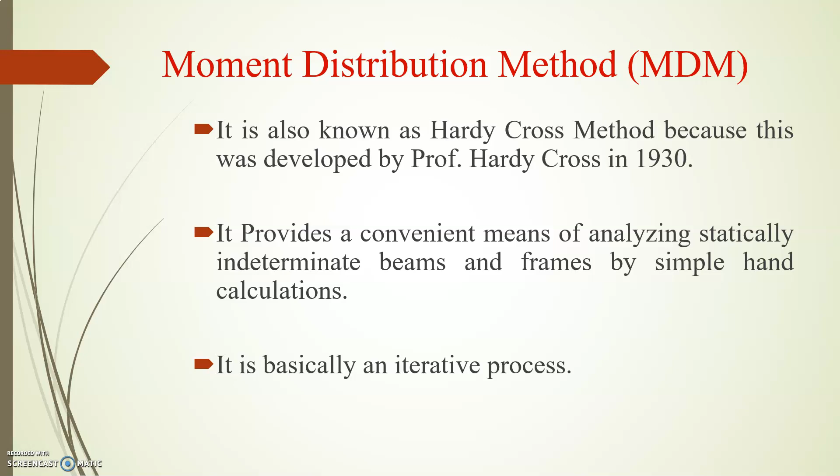It is also known as the Hardy-Cross method because it was developed by Professor Hardy-Cross in 1930. It provides a convenient means of analyzing statically indeterminate beams and frames by simple hand calculations. It is basically an iterative process. Iterative means repetitive - a particular number of cycles need to be performed until we get the desired accuracy. That is called an iterative process.

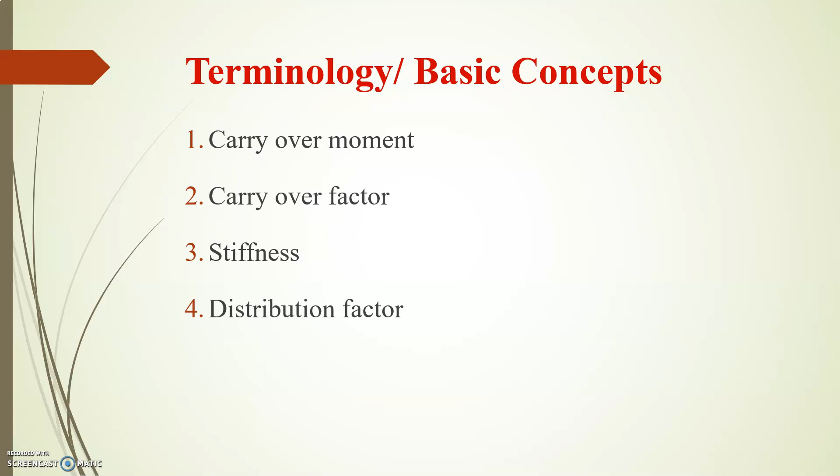Now there are four important terms that one should know before solving the problem by moment distribution method: carryover moment, carryover factor, stiffness, and distribution factor. So what is carryover moment?

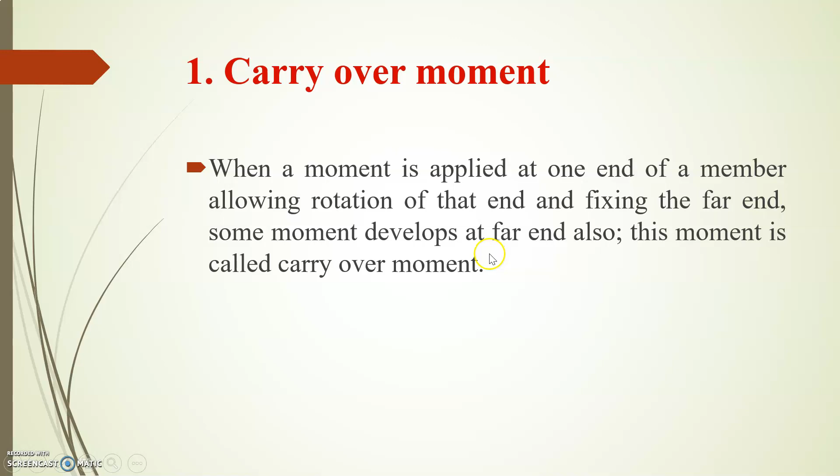When you apply a moment M at one end where rotation is possible, what is the property of a hinge support? It resists the vertical reaction, it resists the horizontal reaction, but it can't resist the rotation - it allows rotation. And what is the property of a fixed support? It resists the vertical reaction, it resists the horizontal reaction, and it also resists the moment.

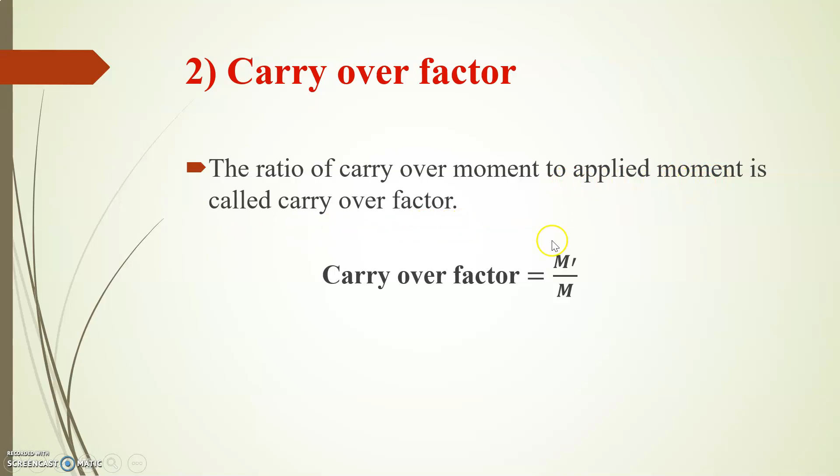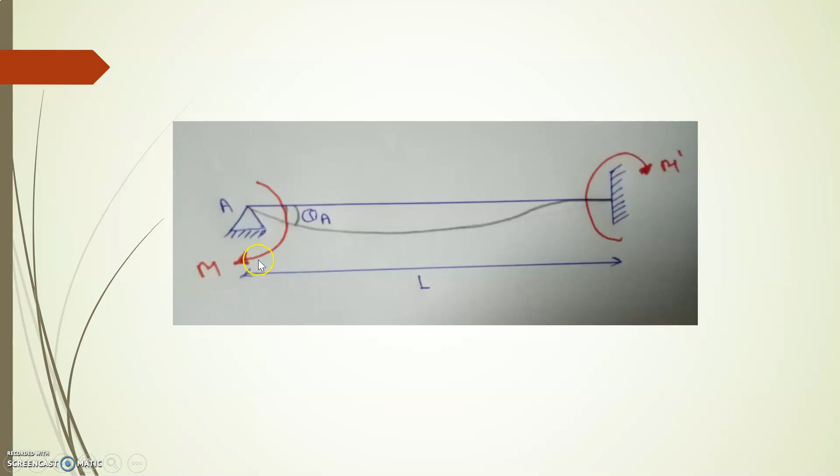The carryover factor represents the fraction of moment that is carried over from the hinge to the fixed end. Hence, in case of a beam where the far end is fixed, the carryover factor is 1/2. Like I said already, if 40 is your applied moment, then half of it, 40/2, will get transferred to the far end which is fixed. If the far end is fixed, half the moment will transfer. If the far end is hinge, no moment will transfer, because the hinge support doesn't have the capacity to resist moment - it will rotate instead. Therefore there the carryover factor is 0.

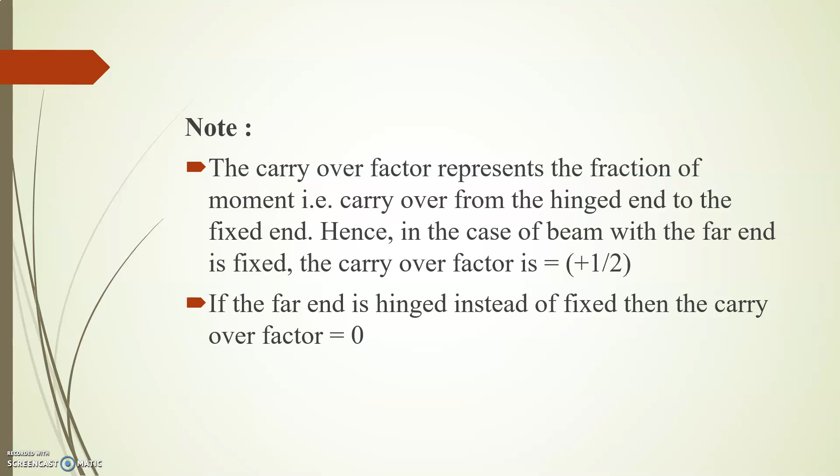Now stiffness - the moment required to rotate one end by a unit rotation, when rotation is permitted at that end, is called the stiffness of the beam. K is M by theta.

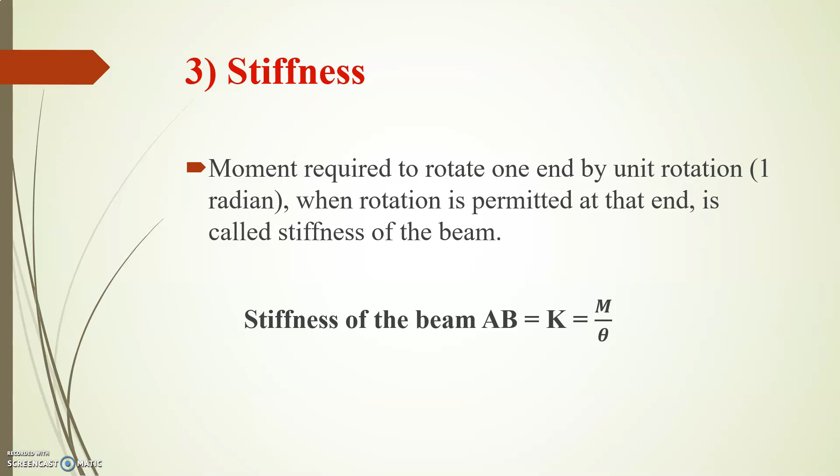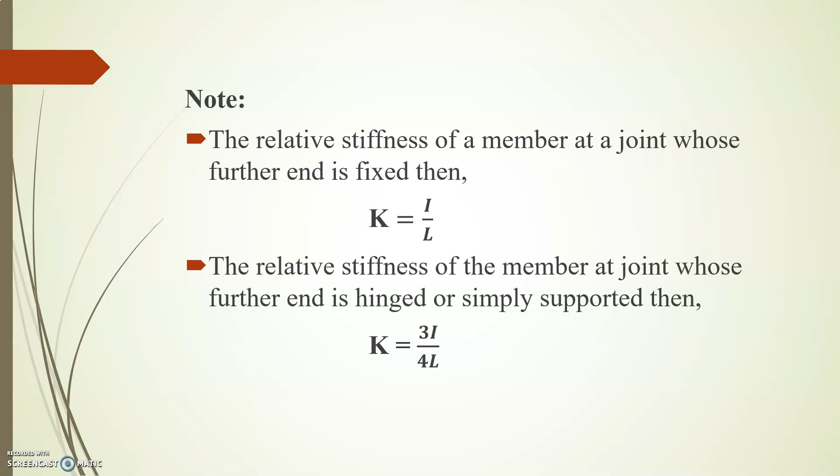The relative stiffness of a member at a joint whose further end is fixed is K equals I by L. Agar far end is fixed hai toh stiffness kya hua? I by L. Aur agar far end hinge hai aur simply supported hai, then K is equals to 3/4 of I by L.

Distribution factor: when a moment is applied to a rigid joint where number of members are meeting, matlab koi aisa joint hai jahan ek se zyada members connect ho rahe hain, then the applied moment is shared by the members meeting at that joint. Ye jo applied moment hai ye share ho rahi hai by these members which are meeting at this joint.

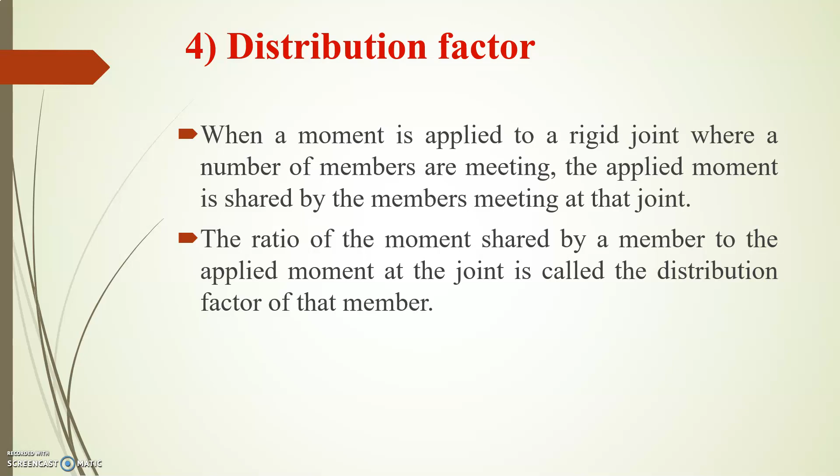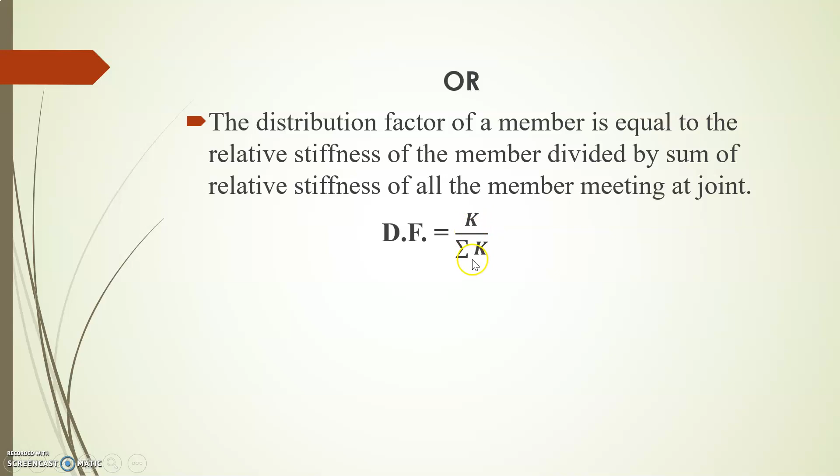Or there is another definition: the distribution factor of a member is equal to the relative stiffness of the member divided by sum of relative stiffness of all the members meeting at the joint. This we are going to use while solving the problem. K divided by summation K. Us member ka relative stiffness divided by sum of the relative stiffness of all the members meeting at the joint is nothing but the distribution factor.

Then sign conventions. Which are the sign conventions that we are going to use here? All clockwise moments are taken as positive and all anti-clockwise moments are taken as negative.

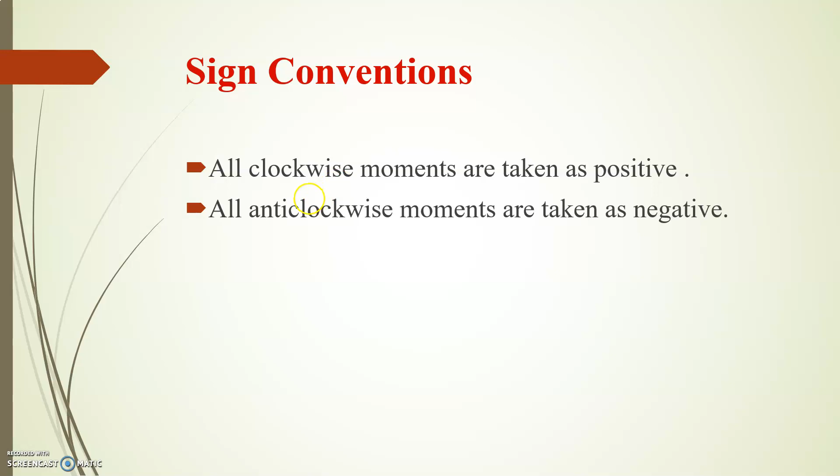Steps in moment distribution method. So step 1, we are going to follow these 8 steps while solving the moment distribution method. First step is the given continuous beam or the portal frame should be imagined as a series of fixed beams, and the fixed end moment by standard formulas are to be calculated.

Then second step is find out the distribution factor at the joint where number of members are 2 or more than 2. If there is only one member at a joint, then distribution factor for that member is 1, provided that the support is simply supported.

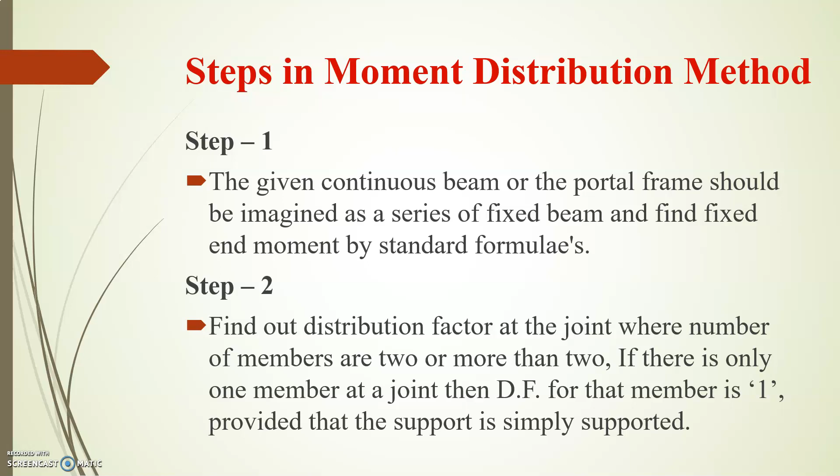Third step is for overhang portion, distribution factor is 0. Step 4, after entering all these values in the moment distribution table, first attention must be given to end support. Moment distribution table banaya jaayega, usme pehle supports dekhe jaayenge.

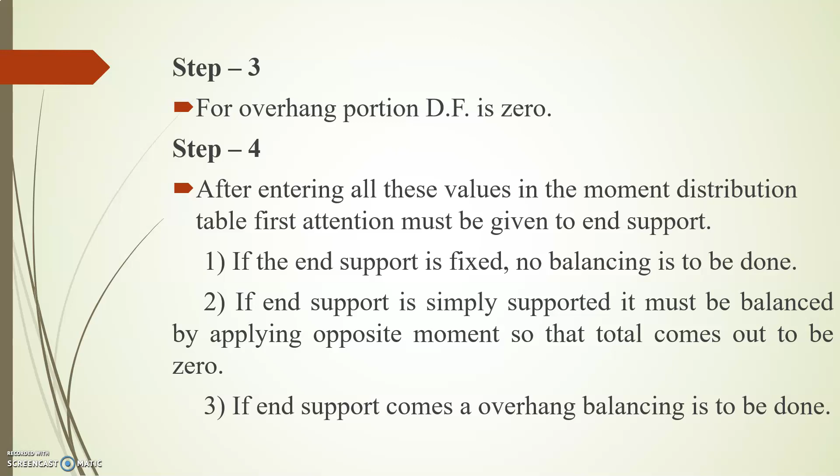If the end support is fixed, then there is no need to balance it, and if the end support is simply supported, then it must be balanced, and if it is overhang, then also it must be balanced.

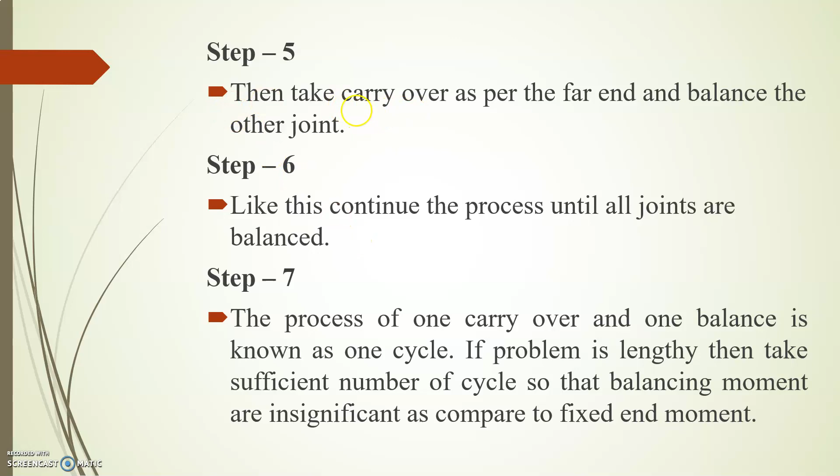If the problem is lengthy, then take sufficient number of cycles so that balancing moments are insignificant as compared to fixed end moment. When you will see the problem in part 2, then you will actually understand the whole process in detail.

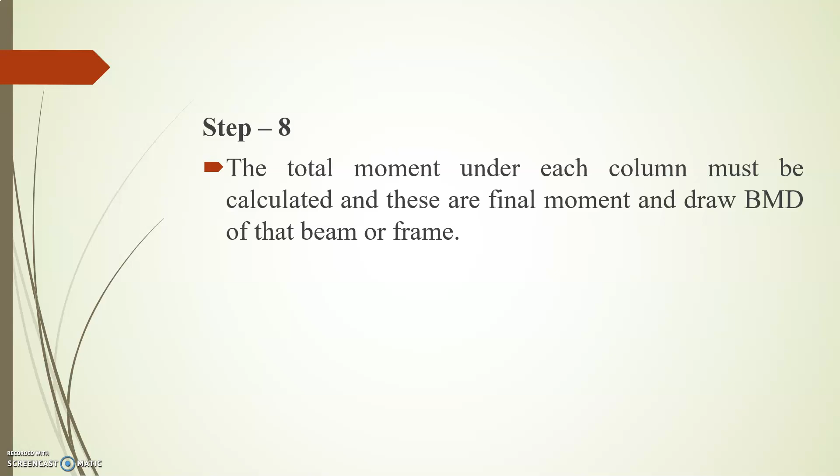The total moment under each column must be calculated, and these are the final moments. Then draw the bending moment diagram of that beam or frame. So what you should do as homework for this part 1, you should write down these 8 steps in your notebook and those 4 definitions, which are the basic definitions for moment distribution method, and see part 2 where we will see the numerical one example problem in detail.